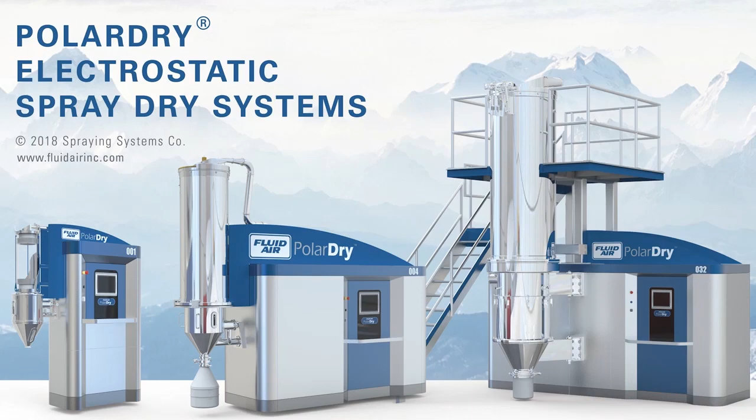In the polar dry system, we can send the most polar component to the outside of the droplet and the least polar component to the inside of the droplet. And what that gives us, in the case of an oil and water emulsion, is a very well encapsulated final product.

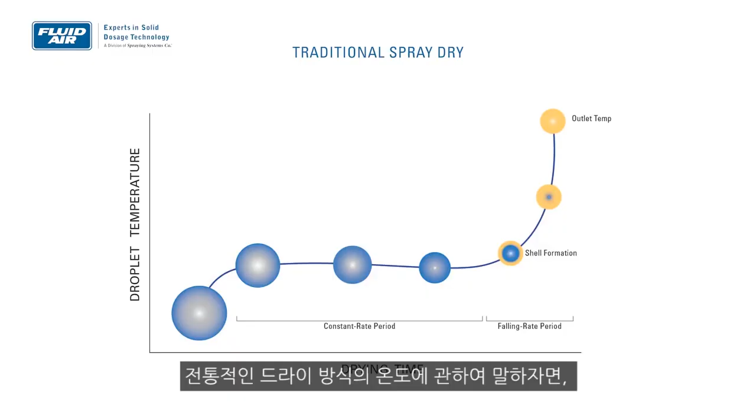In terms of temperature, in a traditional dryer, you're going to have an initial constant rate drying period where almost all of your heat transfer to the particle is going to be latent heat. You're driving evaporation, and that evaporation is going to keep the product temperature relatively cool.

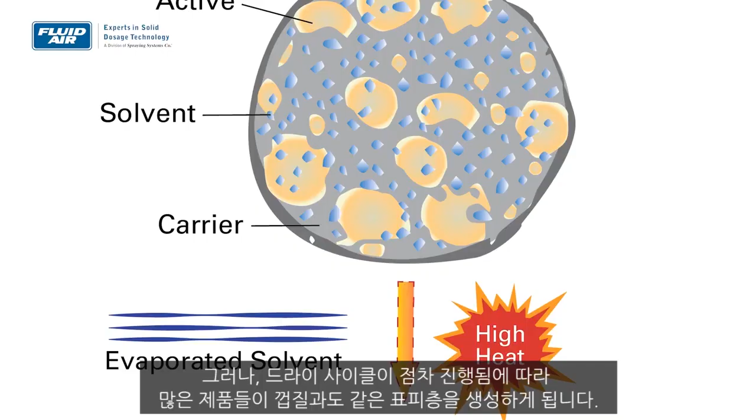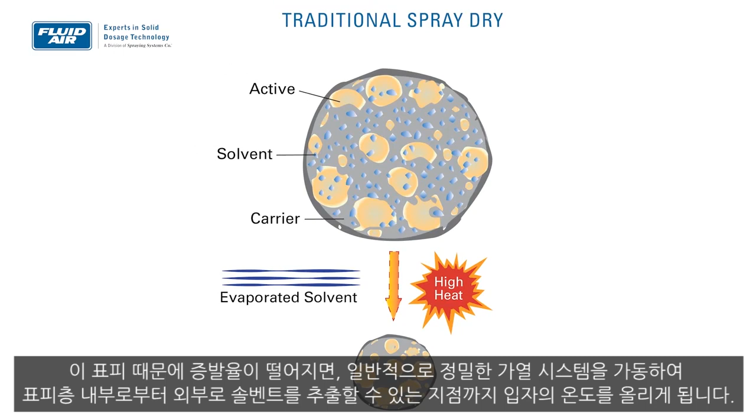But as your drying cycle progresses, many materials will form a shell. And when that happens, your evaporation rate drops. You switch to a period of sensible heating where you raise the temperature of the particle to a point where you can drive off the solvent from inside that shell.

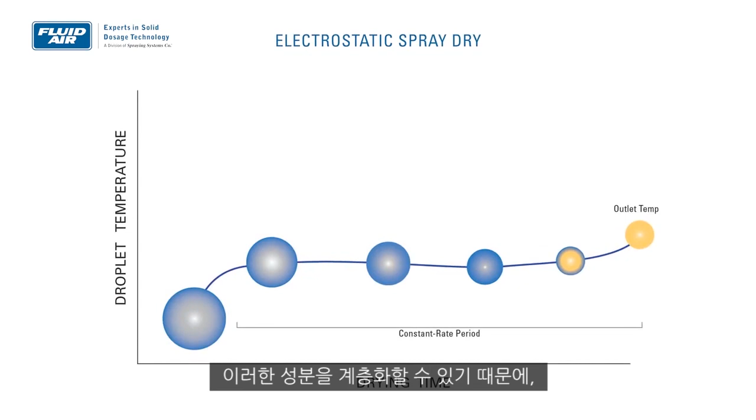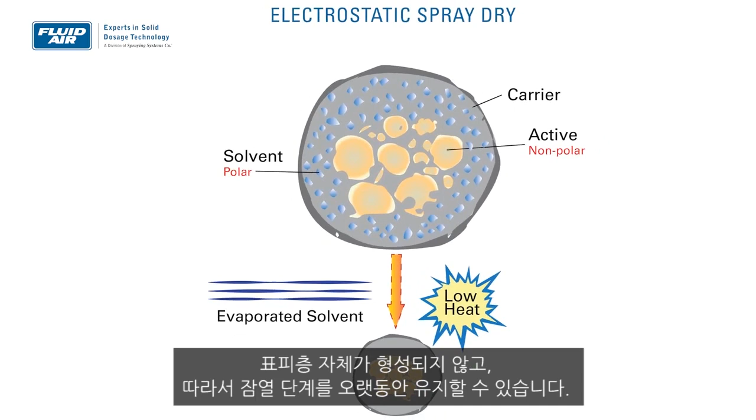Because we are able to, in a polar dry, stratify those components, we are not getting a shell formation. So you can prolong the latent heating phase. Of course, there's going to be some sensible heating at the end, but we are able to dry without relying on sensible heating to remove residual moisture.

The nozzle in this system is really the main difference between an electrostatic spray dryer and any other traditional dryer. We use a two-fluid atomizing nozzle. Essentially, you have a liquid feed, which is one fluid, and you have a nitrogen feed, which is your secondary fluid.

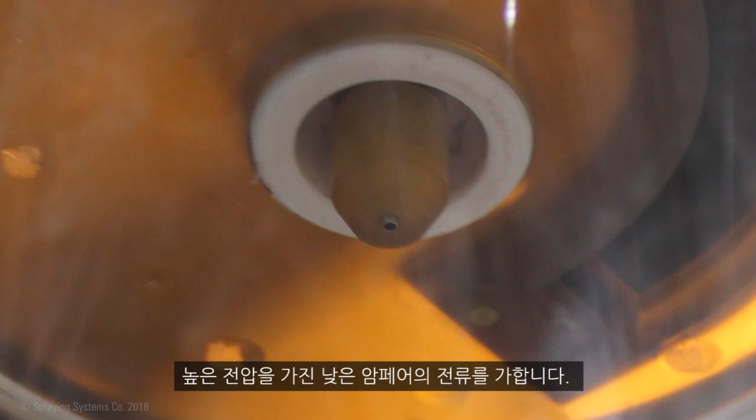And as the liquid is pumped through the inner electrode of the nozzle, we apply a high voltage, low amperage charge. It's an externally mixing nozzle, so the nitrogen doesn't atomize the liquid until outside of the nozzle. But as soon as it's atomized, that is when the charge has taken full effect.

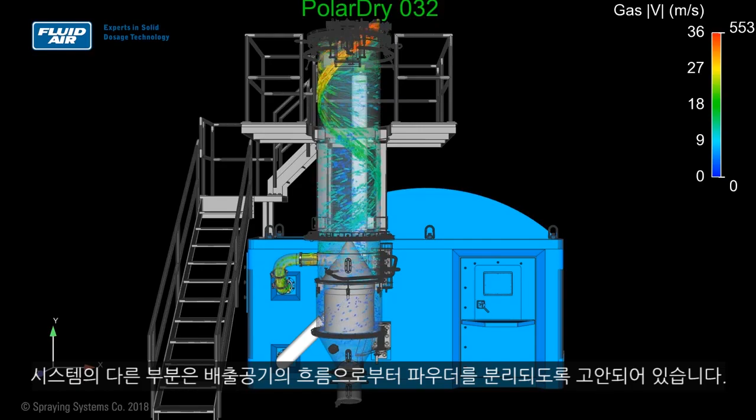But other than that, it's a co-current, so we introduce heated air into the atomized spray. It dries rapidly, and the rest of the system is generally designed to separate the product from the exhaust airflow. On a production system, it usually feeds a vacuum takeaway. And on our larger systems, we dehumidify the exhaust air and reheat and re-inject.